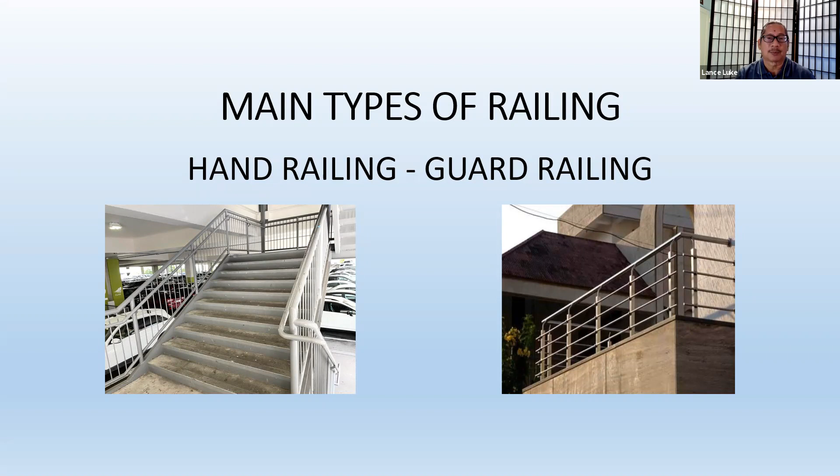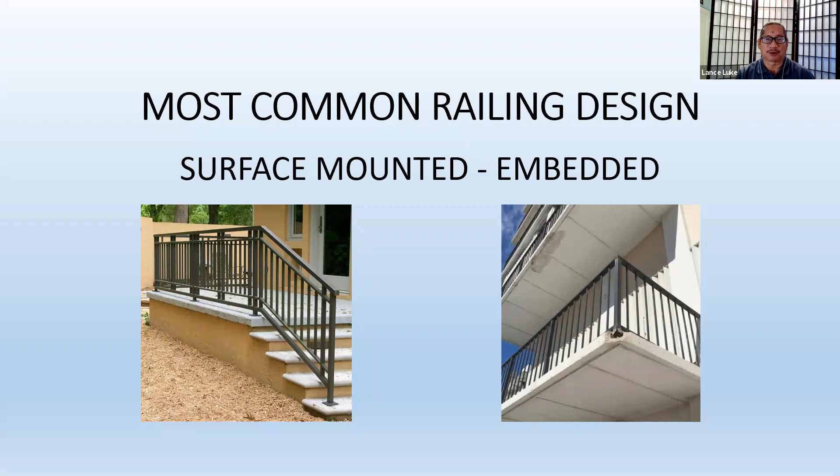So when you walk around at a shopping center or office building or condo apartment building or hotel, look at the railing and determine whether it's a surface mounted type or an embedded railing. Okay, that's a good lesson. Now, what are the specific causes of railing failure?

Okay, there could be any number of components or reasons why the railing fails. It could be due to a design issue where the railing was not properly designed. Maybe it should have been designed stronger, but it wasn't. It could be due to fabrication where it was made and some components were not made correctly. Another cause of railing failure could be installation. The railing could have been installed improperly.

And the other cause would be material. If they didn't use good material, it was inferior, and that's what caused the metal to prematurely corrode or rust or bend a certain way and contribute to some kind of failure.

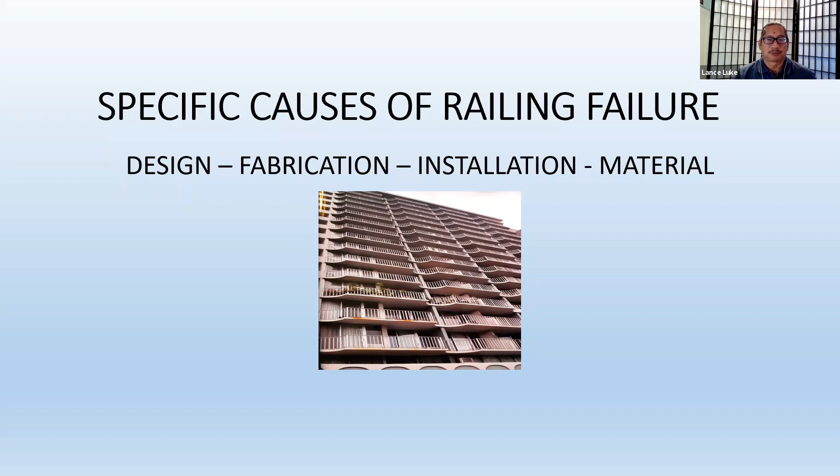So some more specific causes of railing failure. So here we have an aluminum railing, and the aluminum is hollow. The frames are all hollow, and the railing base posts are hollow. The top rail is hollow, and then these intermediate pickets are also hollow.

And what happens is these pickets are there for a purpose. So a pet or a small kid can't fall through. But then if you have 3 pickets missing, that's a big enough space for an adult human to fall through too. So it becomes a very dangerous situation. And once again, there's metal components that corrode, and that's what causes the failure.

So it's been known that aluminum doesn't corrode, it doesn't rust like iron or steel and that type of metal. But believe it or not, it does contribute the corrosion factor of aluminum. It's called white rust. So in my opinion, there is deterioration on the aluminum, and a lot of scientists say that that's not really corrosion, but whatever it is, whatever you call it, it's degrading the components.

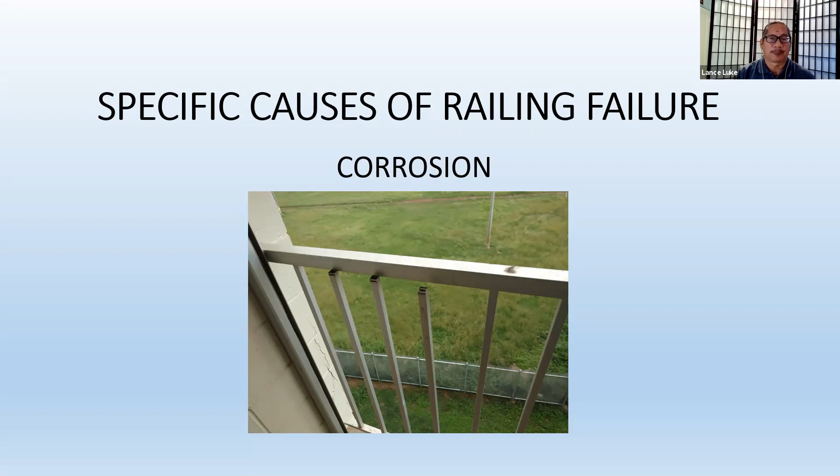And then what happens when the hole gets bigger, the nail or the screw isn't doing their job. And then you have these pickets that aren't secured. And then that whole bottom or top section of the picket gets rotted out, and then it just falls over.

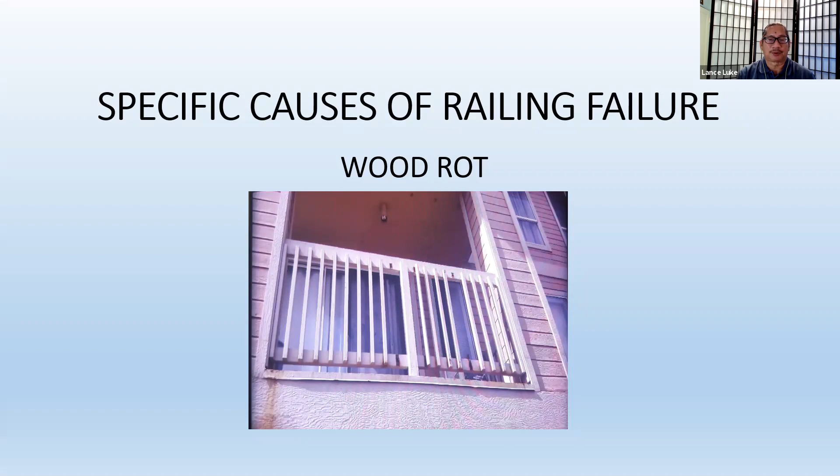So this is a photo of a townhouse, 3 stories. So can you imagine if a kid fell through? So this is not a good condition. It's unsafe, and it's actually a building code violation to have it like this. So if you're managing residential property, wood frame townhouses or apartment buildings, be aware of this condition. It doesn't last forever. Always have it inspected.

Some more causes of railing failure. Actually, in some cases, it may not be the railing itself. It may be concrete spalling. And what happens is water gets into the concrete. And when water gets in, there's reinforcing steel called rebar in the concrete. It comes into contact with the water and moisture. It starts corroding and it starts expanding.

So in this situation, the cause of the problem is not necessarily a railing failure. It's more of a concrete spalling issue, but the railing component, that metal that's inside that post, is corroding. So you could say that it's a contributing factor to the failure of the railing as well as the concrete.

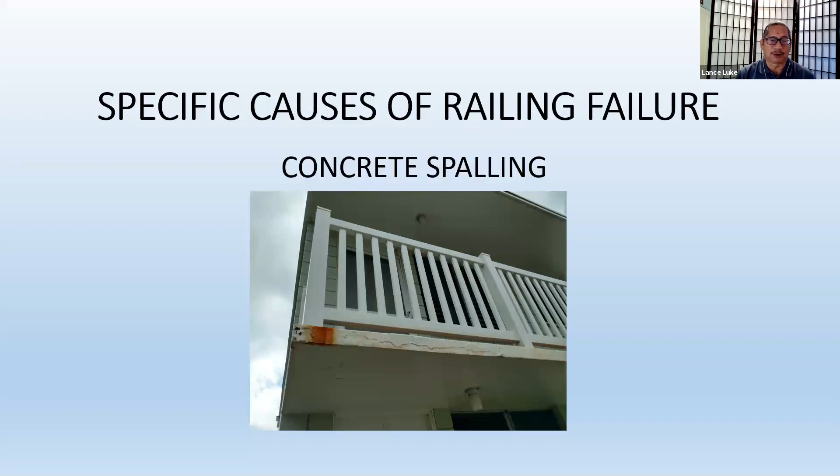Continuing on specific causes of railing failure, you have the base of the railing that normally gets corroded first, because what happens is it's sitting on a concrete shelf or a concrete curb. And when it rains, the water collects right at the base of that metal railing post.

And then what happens is the base of the railing is so corroded that it basically can snap off, or somebody pushes it, the whole railing can topple over. Okay, so remember that railing post is hollow.

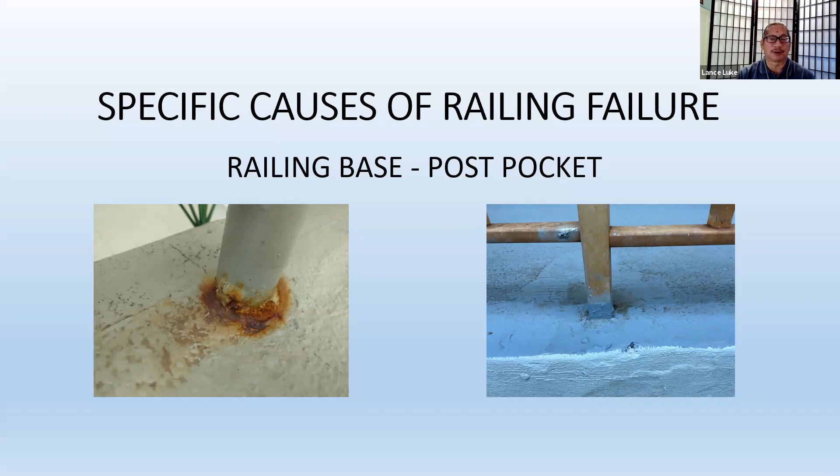Let's talk about some building code requirements. What are the code requirements? Well, the building code requirements dictate the height of your railing, okay? And it doesn't matter whether it's a guardrail or a handrail, and it doesn't matter what type of material. It could be wood, it could be metal, it could be vinyl. Every different material has to follow the exact same code requirements with respect to the height of the railing, and then also the rail and the picket spacing.

Now, if you look at the pickets that are inside, the building code requires that the picket spacing be not more than 4 inches. So in other words, if you took a tape measure and you measured the space between the pickets, it should not be more than 4 inches. And the common determination is, if you have a tennis ball and the tennis ball is 4 inches, if the tennis ball can fall through, then that space is larger than 4 inches. But you don't want to be carrying around a tennis ball with you.

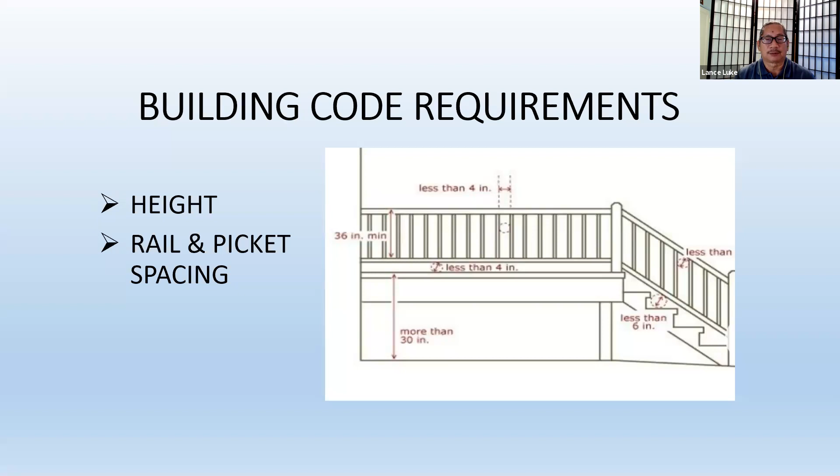So when we're talking about a grabbable handrail, that means the handrail is easy to grab. And believe it or not, there's actually building code requirements that govern grabbing a handrail. So in other words, you cannot have a 2x4 as your handrail because it's hard to grab. Okay, so it has to be easily grabbable. Can you imagine if there's a small kid or an elderly person and the handrail is hard to grab? That becomes unsafe, right? So the building code dictates the measurements of your handrail.

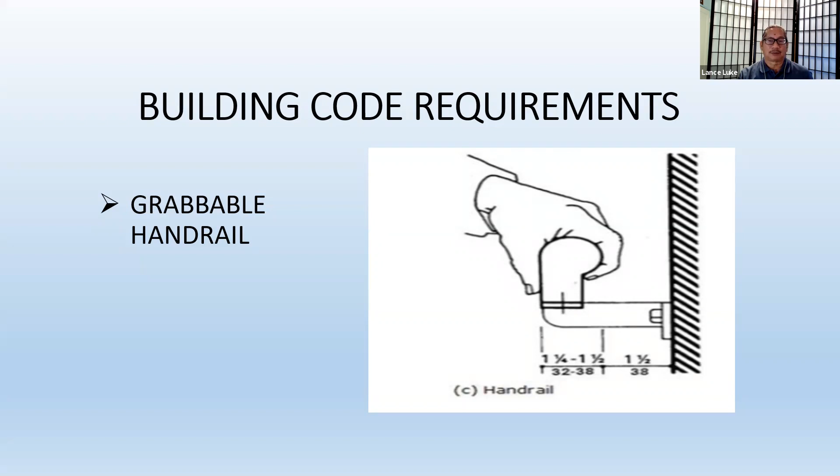Now, some buildings do not have these types of railing. They have maybe a CMU block tile wall instead, or a poured-in-place concrete wall, and that would be in lieu of this type of railing. So they call that a railing wall because there's not too many holes in it.

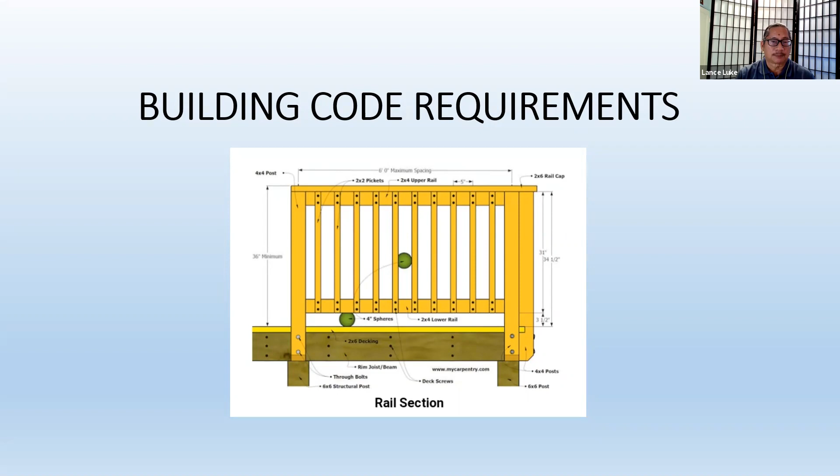Let's talk a little about inspection and maintenance programs now for protection of your railing. Number one, there should be proper inspections completed. And how often are you supposed to inspect the railing? Well, you can go by your maintenance program, and hopefully if you're working in or responsible or managing buildings, there is a maintenance program. If not, I think you should incorporate one in your overall property inspection and maintenance schedule. So inspections are always good.

And then there's a preventive maintenance program, and hopefully you have one, because the idea is to maintain it and repair it before it totally breaks. Because what happens when it totally breaks is now it becomes very costly. So a few dollars spent to prevent something is good savings, as opposed to spending hundreds of thousands of dollars when you have to replace that component.

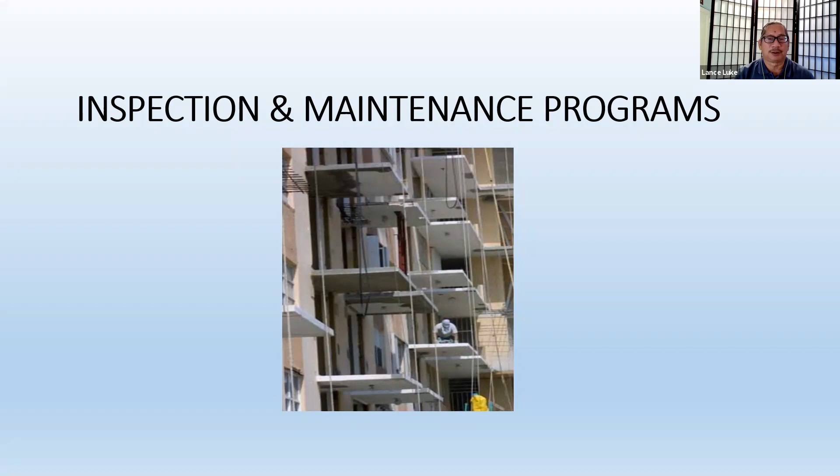So to seal that, you put caulking around it. But what happens is, if the pipe is already corroded, it doesn't make sense to caulk over the corrosion and then paint it, and then it looks good as new after that. But guess what? It's not, because the inside of that pipe is already corroded. And what happens too is water starts getting in where that space is, and now you have concrete spalling.

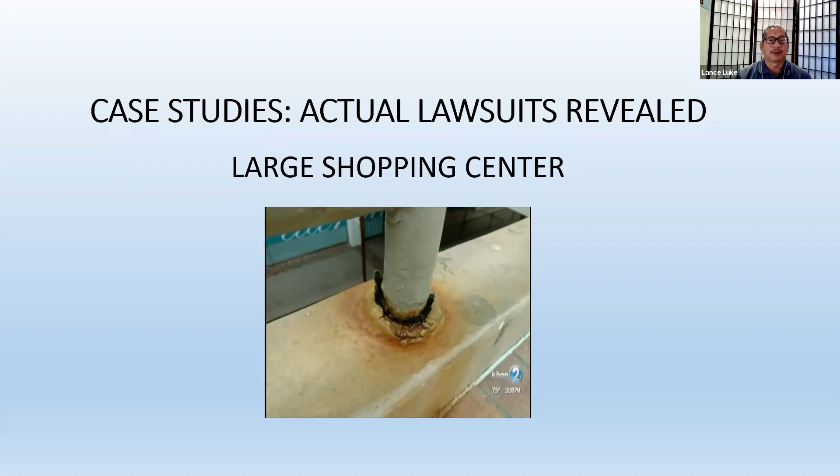So what happens on accidents like this, engineers come in and they start investigating. There's insurance people, and they're trying to determine first what the cause of the problem was, and then why did the railing fall over, because at this point, especially when people get injured, there's always lawsuits, and it has to be proven what the cause of the problem was.

Why did the people fall over? They fell over because the railing collapsed. Well, why did the railing collapse? Well, it collapsed because of certain factors. One, the wood rotted out. Two, it was improper design in the first place. Those kind of things. So it gets kind of hectic when there's lawsuits.